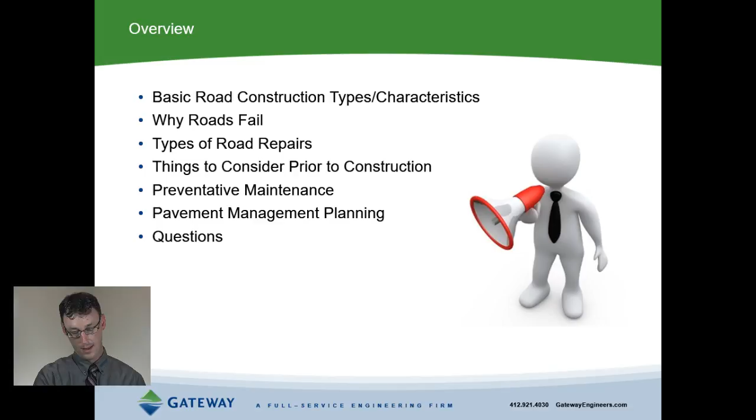So I want to start off talking about the different types of roads that we see in this area, mainly asphalt, brick, concrete, and tar and chip. I'll start off with the asphalt roads. That's the most common construction type in our area.

Superpave is the current asphalt mix design that's approved by PennDOT. So there's Superpave wearing and binder course, and that's currently what's approved by PennDOT. The Superpave mixes, I believe they started around 2003, 2004, I think. Prior to that, it was the old ID2 mix, or the Marshall mix, as they called it.

Let me walk you through a typical cross section for an asphalt road. I have a little detail there. It might be hard to see. Now this detail is for, I would say, a newly constructed road. Your current roads, the older roads, probably have a different mix of materials under them. But for a new asphalt road, I'll start off at the bottom with the subgrade, and some of these terms you're going to hear over and over throughout the course.

So the subgrade is the dirt or the soil portion at the very bottom of the cross section. So that's kind of where you're starting. You want that compacted, and then you place a geotextile fabric that'll act as a separator between the subgrade and the sub base. Your sub base is typically an aggregate stone, whether it be a mix of PennDOT 2A, which is like a smaller stone with fines. Sometimes you have a mix of a number 4, which is a larger stone about the size of your fist. And then above your sub base, you typically have an asphalt base or a binder course or both.

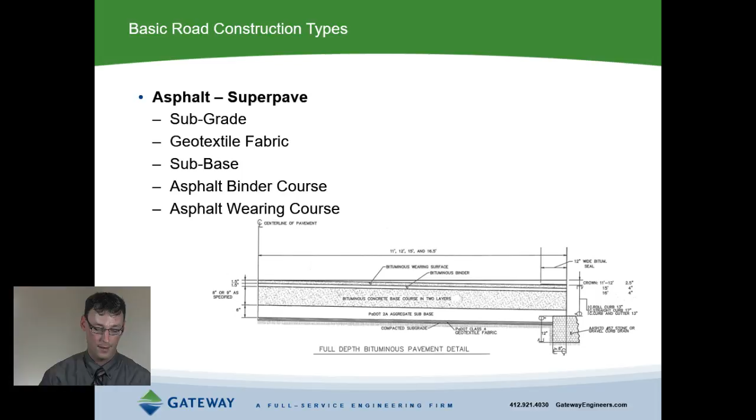Next, I'd like to review brick streets. We do have a lot of those in this region. A lot of them have been here for a long time, 60 to 80, 100 years maybe for some of them. Again, on a brick road, just walking through the cross section, you'd have your subgrade or soil. Your sub base, you may have some stone, you may have a sand and gravel mix, or you may have a base course of like a concrete base with a bed of sand. That's so you can set the pavers on top at the right grade.

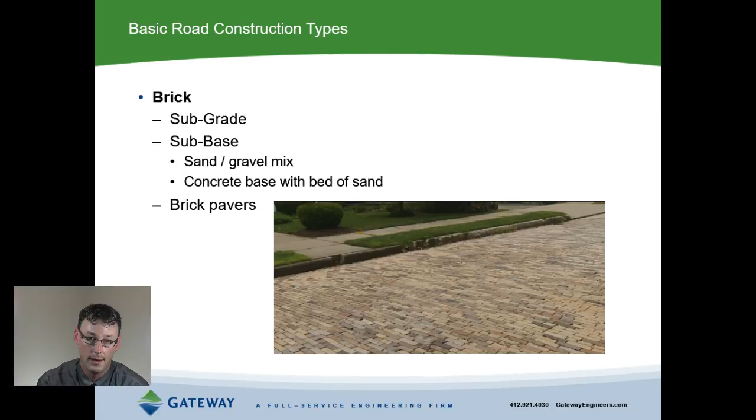Next is concrete. We have a lot of these roads in the area too. Again, you have your subgrade with some fabric, and then you typically have a stone sub base, which would be about 8 inches, typical for new construction. And then on top of that, you'd have your 8 to 12 inches of reinforced concrete. It could be thicker than 12 inches. 8 inches is definitely the minimum for a roadway. But it depends on the loading and the traffic on it. If it's heavy traffic, or like a highway, you would definitely have a thicker concrete pad.

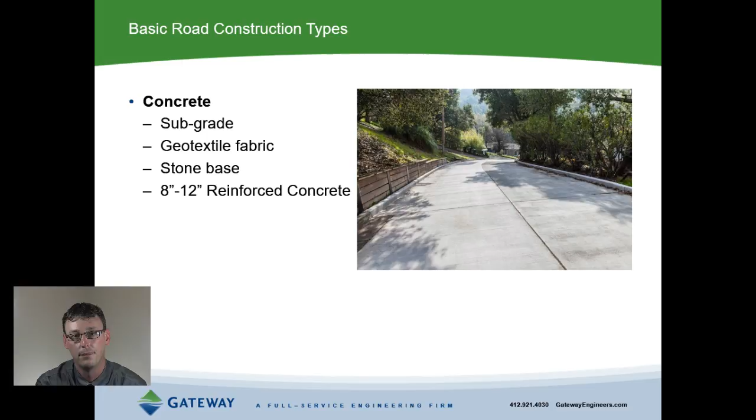Also, I want to mention, these are typical for new construction. Your existing roads, a lot of them have some kind of stone or slag base, or like a red dog base with whatever on top of it. But I'm just walking through the typical standards for today.

The final type I want to talk about is a tar and chip, or a seal coat, just another term for tar and chip. That's basically a thin layer of stone with liquid asphalt. It's mostly used on rural roads. It's a great application and treatment for rural roads. It's fairly cheap. It's a little rougher surface than an asphalt wearing course, so it's not something you see in town areas and whatnot. It's usually not a good fit for that. But again, under these roads, if it's more of a rural road, it could just be an old stone road, and over years and years of tar and chip that's built it up over time.

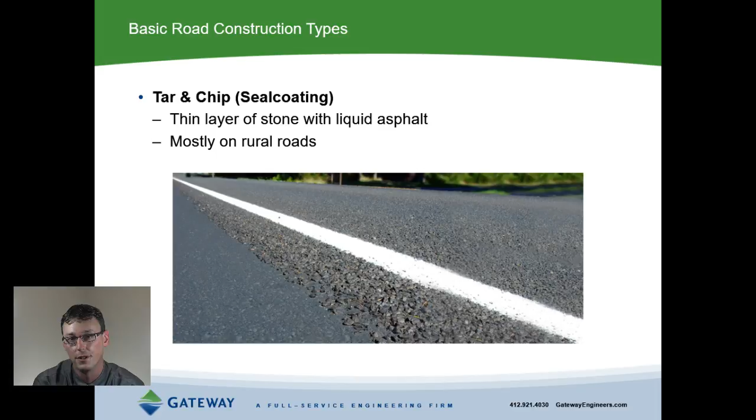Now I'd like to talk about why roads fail. The number one reason is poor drainage, or water. Water gets into your subgrade or sub base: you get cracks, it rains, water will filter down through, you have a freeze and thaw in the winter, and it'll expand and contract. So water is the number one reason why roads fail. There's surface drainage. Some of your streets have a stormwater collection system, inlets, piping, and so on, and some don't. Maybe it's something you need to look at as you're going through your upcoming road program, to see if you need to add some drainage.

Another big issue is your subsurface drainage. Newer roads that are constructed, we recommend installing underdrain piping on both sides of the road. This piping would be installed usually on the edge of the road or underneath the curb if there's a curb. And it's a 4 to 6 inch diameter perforated piping that is bedded and totally surrounded in stone.

So any subsurface water, maybe if there's a spring or maybe water that would come down through the surface, would filter into the stone and into the piping, and then that piping would connect to your storm sewer system or daylight somewhere. It would need to be daylighted and connected somewhere, which is typically your storm sewer system.

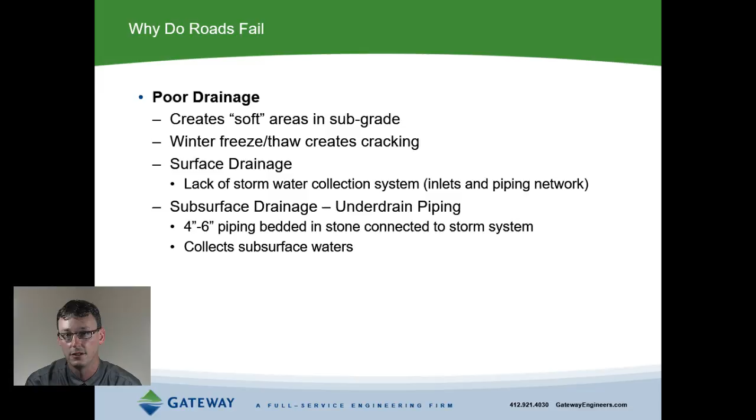One thing I don't have on here I wanted to mention was roof drains. A lot of communities, whether it be homes or businesses, some of the roof drains come right out to the street, and that's just added water that collects. And if you don't have a good surface drainage system, that water could sit there, could pond, and it could cause more damage to your road. So it's something maybe you want to look at, collecting those roof drains somehow, whether it be in a collection system or whatnot, to keep that off of your roadway.

Next is base failure. Really, the base failure could come from poor construction or materials or your drainage. We talked about the drainage in the previous slide with the cracking and subsurface drainage. The poor construction, maybe it wasn't installed properly, proper compaction. Maybe the wrong materials or the materials were bad. This is one reason for base failure.

Another reason why roads fail is heavy traffic. I don't mean the amount or number of cars, 1,000 cars a day. It's more the heavy truck traffic on roads that weren't built to handle it. So if you have garbage trucks, every community has garbage trucks, but then you add school buses, and then if you have a bus route or there's a truck route, that can really take a toll on your roads if they're not built properly to handle it.

And I've listed salt. All communities use salt in the wintertime to salt their roads. It doesn't have a major effect on asphalt, but on concrete it does if you have a concrete road. So that'll cause issues with spalling and deteriorate it at a faster rate.

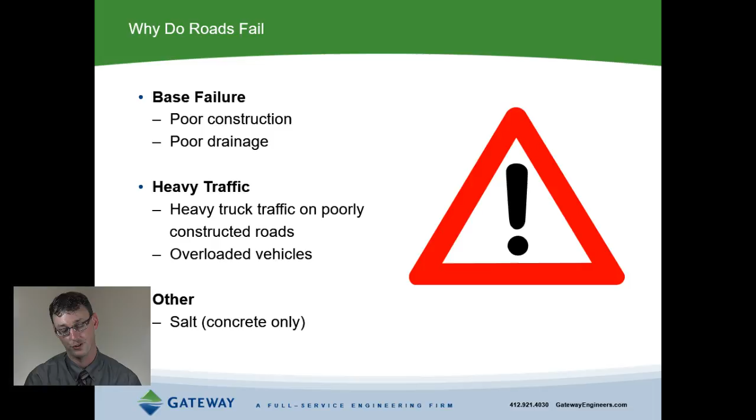Now that we've talked about the construction makeup and why they fail, let's talk about some repair options. So we'll start off with our asphalt roads. I just want to walk through a typical milling and resurfacing that we recommend, and we would start with the milling of 3.5 inches of the existing asphalt. So we'll remove about 3.5 inches of the existing asphalt wearing course and binder course.

Then we do what we call a proof roll with a loaded triaxle dump truck. So that triaxle is loaded. After it's milled, we have it drive on that milled surface, so we see if there's any areas of rutting or pushing or any soft areas. So if we see any areas like that, that's considered a base failure or a soft spot.

These areas are hard to detect prior to starting work. So it's one of those things you would need to leave a contingency in your budgets for soft spots, because it's something that you don't know until you start your milling and paving work.

And after you find your base failure or your soft spots, you need to dig those areas out, maybe install fabric and then a layer of stone and then a layer of asphalt on top of that to meet with that existing milled grade. And then after that, you would resurface with your 2 inches of binder course and then an inch and a half wearing course.

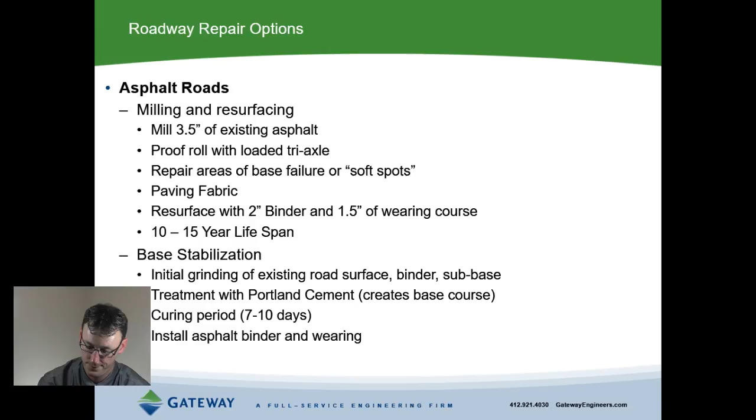You'd want to compact that soil, proof roll it like we talked about on the milling side, and find any soft areas in that subgrade for pushing or rutting. The fix for a subgrade soft area is a little different. You mainly just use stone. Put a fabric in and maybe some larger stone, the number 4 stone with some 2A, and just dig out all that soft material and replace it with fabric and stone. Again, if you're doing a full reconstruction, we recommend under drain on both sides to catch that subsurface water.

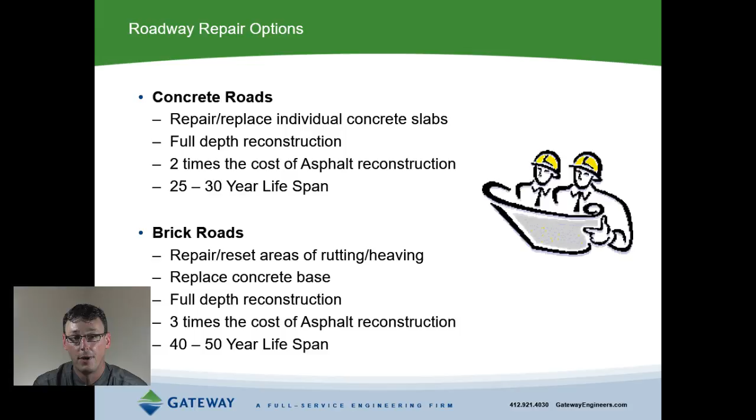Now I'd like to review some things to consider prior to construction. These are really things you need to look at after you've chosen the streets that you want to repair for that year. You need to go out and take a look at the drainage for sure. Are there inlets on there now? Are they damaged? Do they need replaced? Do you need new inlets and piping? Do you need to install some underdrain in areas that are soft? Sometimes you can see a low-lying portion of a roadway and there's water that sits there. Maybe you can put some inlets or some underdrain in that area.

You may need to do adjustments for the road crown or contours of the road. Sometimes that's difficult if you have curbs or existing driveways. And then also maybe address the roof drains. That road's going to be torn up, so now's the time to take care of all your drainage issues.

Utilities, definitely try and coordinate. As soon as you know the roads that you're paving, you should coordinate that with the other utility companies: the water, the gas, maybe the sanitary sewer authority if they're not owned by your municipality. Because there's nothing worse than the community milling and paving a street, and then the gas company comes out a year later and tears it up and paves it again. It's kind of a waste of funds for the community, the utilities, and the taxpayers.

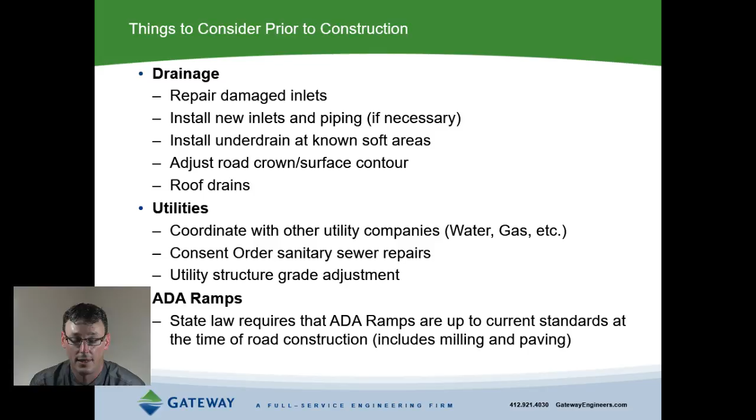I also have curbs listed here, and this varies by community. I'm referring to a concrete curb, for example. Some communities take responsibility for that concrete curb, and in some areas it's the responsibility of the property owner. But if it's the municipality's responsibility, you should probably take care of that damaged curb now, while you're doing the construction for the road.

And also you want to be sure your curb reveal is adequate to direct your stormwater. The curb reveal is the area between your road surface and the top of the curb. You want to make sure that's not too low or too small, because sometimes roads get overlaid and overlaid and overlaid, and nothing gets taken out, and there's very little reveal left, and then it rains and the water goes onto the sidewalks or down driveways.

Also with curb, if you have an asphalt wedge curb, some areas do recommend, if you're milling and paving a street, just mill and pave that curb out and replace it.

Soft spots we talked about earlier; they are difficult to detect prior to the start of construction. So you want to leave a contingency in your budgets for soft spots. You may pave 10 streets and have no problems at all. But one year you may pave one street that is all soft spot, and it's using up all of your quantity. So you just want to plan ahead for that as best as possible.

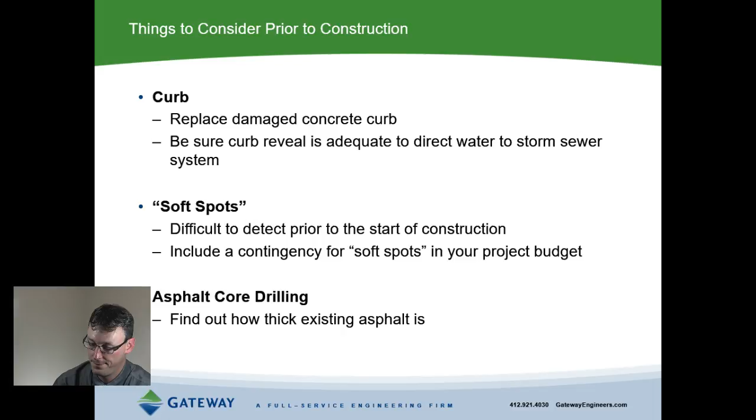I have a few preventive maintenance tips I'd like to talk about. We'll go by street: asphalt, concrete, and brick. For asphalt streets, the easiest one is crack sealing. It's not very costly. Your public works crew can do that, or you can hire a contractor. Basically, you see a street with cracks on it, you have a tar buggy, they call it, and just put tar, liquid asphalt, over that crack, and that will help prevent water from getting into it. Especially for the winter months, it's good to do that in the fall.

It's something that has to be done every year. You'll seal a crack one year, and you have to come back the next year and do it again. It wears off, but it's definitely a good, simple preventative maintenance for asphalt streets.

I have Reclamite listed here also. Reclamite is a penetrating sealer. Some communities in this area use it and like it. It's not a sealer that goes over top of the street. It actually penetrates into the asphalt and rejuvenates it. It replaces the vital ingredients that are lost from the pavement's binder due to UV rays and wet weather exposure. It's fairly inexpensive; I think it's around 80 or 90 cents a square yard.

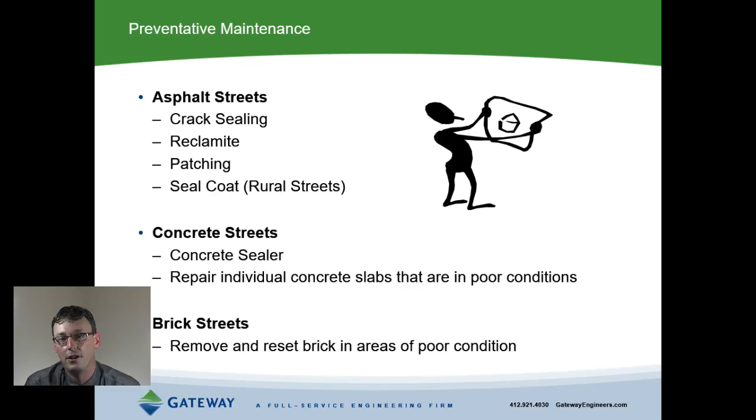For concrete streets and brick streets, there's not a lot of preventative maintenance. A concrete sealer on your concrete streets, or you could just come and repair individual slabs in poor shape, like we talked about earlier. And for brick streets, we're looking at just removing and resetting the brick that are in poor condition, maybe redoing the base if needed to get the grades back to what they were.

Finally, I'd like to spend some time discussing pavement management plans and the importance and how helpful they can be. When I talk about a plan, I'm talking about a 3 to 5 year plan, long term. And it's not a plan that can be etched in stone and you have to do these streets, because things change over time. Weather takes its toll differently on different roads and so on. But it's good to set up a plan.

So how do you start? Well, you start by evaluating streets, and there's a few ways that you can do that. One is just visual inspection. You can drive around your streets. It might be a little easier with a smaller community compared to a larger community, but you drive around and you rate your streets. Whether it's just a personal rating of the public works crew that's rating them, 1 to 10, and then find your worst and your best streets and base it off of that.

There's a company called RoadBotics. It's newer to the area. It's a company that was developed at CMU, and they've developed an application for their smartphone, and they mount it to the windshield of their car, and they drive each street. As they're driving, I think it's every 10 feet they get a photo and a rating. They have a 1 to 5 rating system. So every 10 feet, snapping photos and giving it a rating.

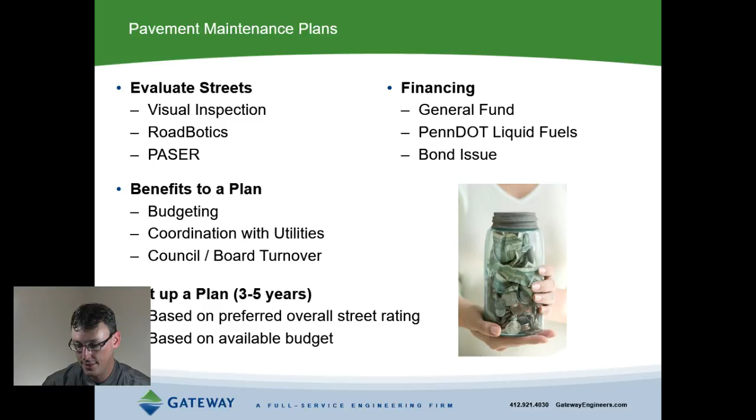I hope everybody enjoyed this. I started off talking about typical construction and materials and some problems, and we ended with the planning, which to me is the most important. Get a good plan started, and moving forward, it'll get easier and easier. So that concludes my presentation.